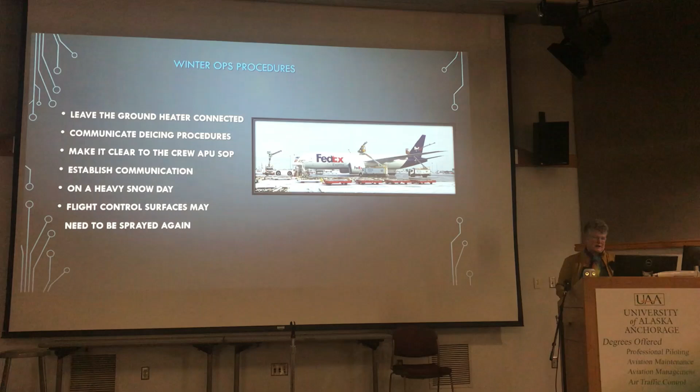And sometimes that de-icing process could be lengthy, especially when we turned it over to IDS. They didn't have the truck with no regulation on how much fluid was being pumped out of there like when we operated them. So because of environmental reasoning, you don't want all that fluid going out, but because it takes a while, you're gonna oftentimes have to spray those flight control surfaces again. And a couple more pictures of the heavies, and we'll get to the small ones.

Okay, so remember, inspection of that exterior of that airplane is important. So is your engines. You always have to remember ice fog is a foe, okay? We get a lot of it here in Anchorage. Get down around that 15-degree mark, dew point's just right, you're gonna have that ice fog. And when it comes to your engine inlets, super crucial.

That airplane taxis in, it collects that frost, it melts into a puddle at the bottom of the engine as it's sitting there on the ground, that refreezes. This can happen in a short ground turn. And presto, you have clear ice sitting in the bottom of that engine and your blades are sitting right there. You go to spool it up and it's not gonna be good. Okay, so we always had to be very cognizant of that.

You always had to inspect your landing gear, your engines, your wings, your fuselage, empennage, nose of that aircraft, looking from the front and back of those blades for damage or frost or clear ice. Because your winter ice checks are crucial. And it doesn't matter whether you're on a small plane or a big plane.

Right, but we are seriously governed by the FARs when it comes to keeping those airplanes free of ice, okay? So it doesn't matter if you're Part 121 or the small planes, Part 135 operators and 91, you're gonna have to all be in accordance with your FARs for keeping those airplanes clean. The clean aircraft concept. You're not going to take off with snow and ice on those wings, whether you're on a 747 or a Super DC-3.

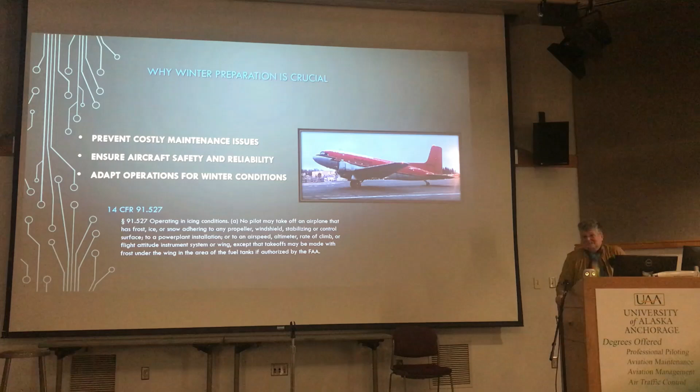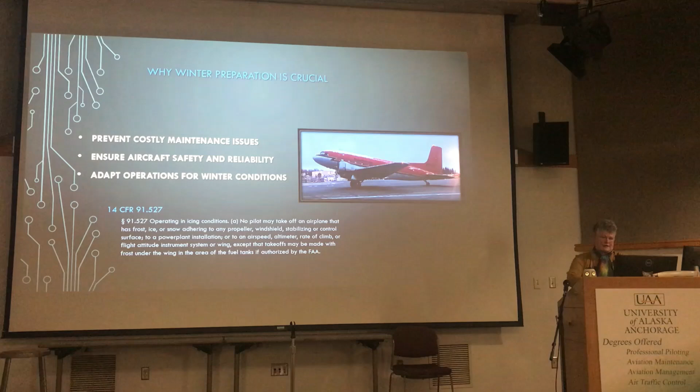If you're going somewhere where you're not used to flying into, check with the people who are there. You guys all know that, you're pilots. Here I am giving you advice to things that you've already lived a lifetime of doing, right? So don't let compulsion take the place of good judgment is really the bottom line. Prior planning will prevent costly maintenance issues and ensures those aircraft are safe and reliable. And remember, compliance with your Code of Federal Regulations 91.527 when we're talking about operating in icing conditions.

Now getting on to some of the mechanics of it. Minimizing corrosion risk is a good idea when we're talking about winter flying. Seal those openings, your vents, your fuel caps, etc. You can apply corrosion inhibitors to your metal parts. You can use desiccant plugs for your engine. If you're going to plan on not flying these airplanes, you want to take care of them to reduce the risk of what the harsh environment's going to hand to it. You know, it's sitting outside all winter long.

That engine oil is extremely important. It's good to use an anti-rust additive in it. And of course, comply with your maintenance manual recommendations always, but you want to make sure you meet your mil specs. So this picture of this aviation anti-rust oil container, Phillips 66, meets the mil spec MIL-C-6529. So you can check that with Lycoming, Continental, whatever your engine manufacturers are, and also airframe manufacturers regulations. You never want to put something in there that's not recommended.

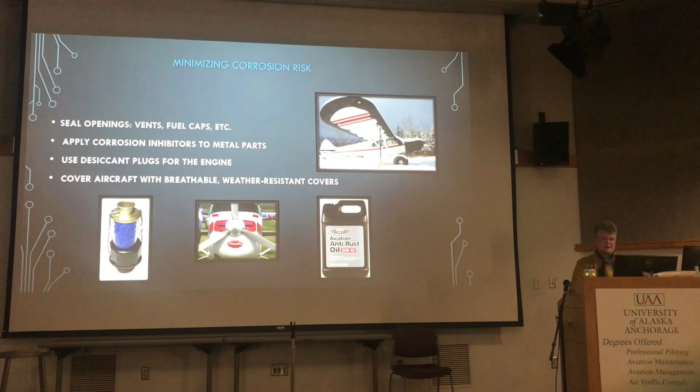Covers are good. Cover your aircraft with breathable, weather-resistant covers. Those can save you a lot of effort with your snow and ice removal. And then, of course, the engine plugs and covers. Sometimes they're referred to as cowl blocks, engine bungs, however you want to say it. But keeping weather out of those areas where it can get in is probably one of your best tools against shortening the life of your equipment.

Okay, so basing your airplane in a dry climate, washing it often, placing your airplane in a hangar, treating chipped paint and keeping windows and doors tightly sealed is ideal, but not really feasible on a regular basis.

We're not going to be washing our airplanes here. It's not like we can take them to the car wash like we do our cars, unless you have a hangar. But if you can do any of these steps, then you're lucky. And I would like to recommend at least performing a corrosion inspection prior to purchasing, or you may encounter what we did with that same 180 that we purchased out of Cordova in the 90s.

Oh, it was a great deal, $40,000, came with a couple sets of floats. Evelyn and I had just gotten out of school. Guess what our first job was to do? Replace that landing gearbox. Good thing we'd had a good sheet metal instructor here, because that was not a fun task. But I highly recommend doing your corrosion inspections prior to purchase, because we got not only to learn how to replace that, but we learned exactly what intergranular corrosion looked like.

Okay, and so there's a picture there on that bottom left. It's the Cessna gear brackets and the inboard angles that were manufactured originally using an extrusion process, which is geared for high volume, lower cost production. As that aluminum was extruded, the molecular structure of that material was altered, which made it more susceptible to developing that intergranular corrosion.

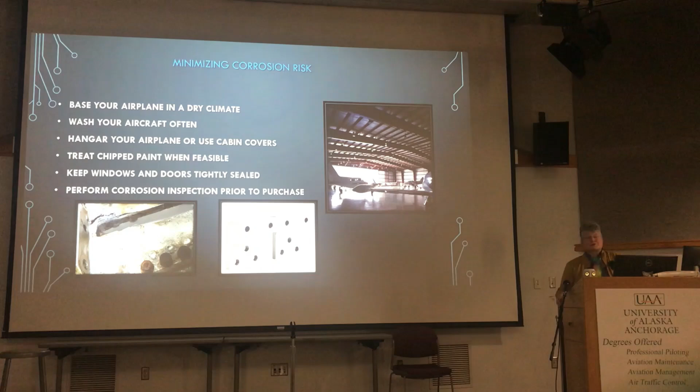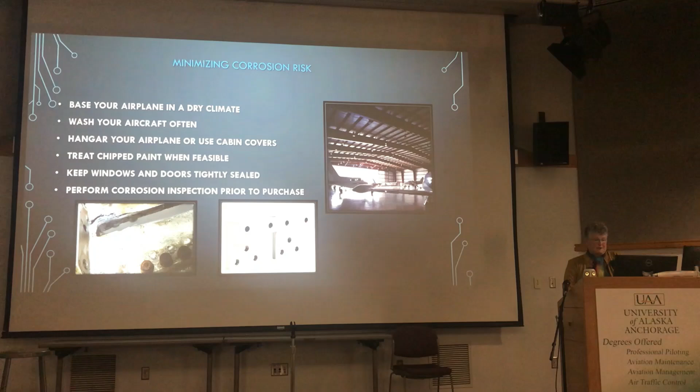So there's a picture of the P-Ponk upgraded, re-engineered inboard angle brackets for those Cessnas, whether 170, 180, or 185s. A lot of you probably already know about that, but you see these advertisements for these planes that say P-Ponk upgrade. Well, that's what they're talking about. Corrosion, so they make that as corrosion resistant as possible.

Of course, picture on the right there. If you can afford a fancy hangar, more power to you. That's where I want mine kept.

So anyway, if your home base, like most people, is located outside, there are some risks that can be imposed by prolonged heating of your engines. You don't want to just leave a heater on them. You want to use a thermostatically controlled heater and heat it only before flight to minimize that moisture, because the more you heat it up, cool it down, heat it up, cool it down, the more susceptible it is to moisture damage, okay? So heat it before flight to minimize that moisture.

What's your thought on Tanis? Tanis is now saying the opposite. Tanis is saying don't unplug it, and you'll have no corrosion. Yeah, if you're running on a regular basis, but for people who are just flying once in a while, once a month, you're not gonna leave it on heat continuously.

But yeah, I was reading over some of that Tanis. Some of their products they're pretty proud of, if you can afford them, but they do have the block heaters and the cabin heaters, and I will look into that. Most of the information I pulled was out of an FAA circular for winter tips on flying. But there's so many things, you could go all over the place trying to figure out battery charging, heaters, what are the best solutions.

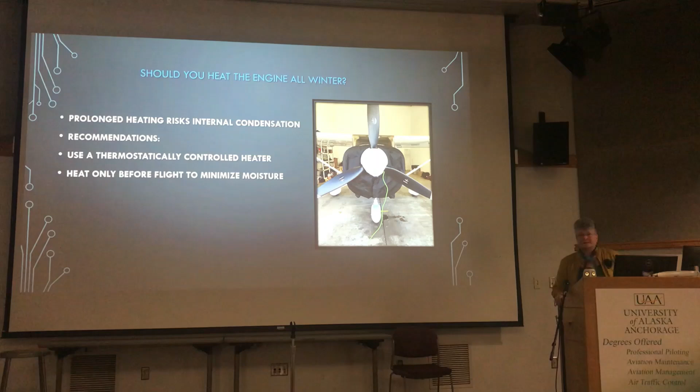What are some of your thoughts on heaters? I know it's all over the place as far as what type of heaters. Any of you have something you really prefer for a method of heating your fuselage and your engines? Ceramic heater, plug-in. I guess it depends on what kind of power you have available. If you have electricity, you're going to plug in electric heat, but if you don't, you're going to have to use propane or whatever fuel you have available, white gas.

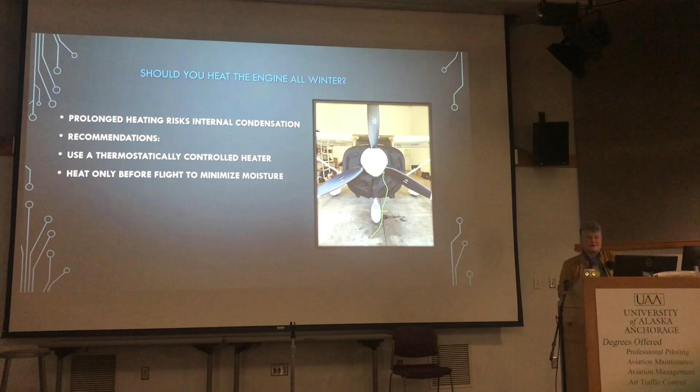But the biggest thing is water. Water's your enemy. You don't want moisture in there. Plan on how you want to preheat your engine. Some other tips: check your runway conditions, consider your weather changes, clean that frost off before you go. These are all just tips. Pre-flight inspection is important in temperature extremes; it's natural to hurry over the pre-flight of an aircraft, but take that time for your pre-flight inspection.

You want to consider also fuel contamination possibilities with moisture. Half-empty tanks in the cold, possibility of condensation, it's better to keep them full. Fueling facilities can also have problems in the wintertime, so checking that fuel, making sure it doesn't have water or contaminants in it, is important. It says fill your tanks up as soon as possible after landing. Drain the fuel sumps to remove any water which may have been introduced. Be sure the fuel being delivered for your plane is clean.

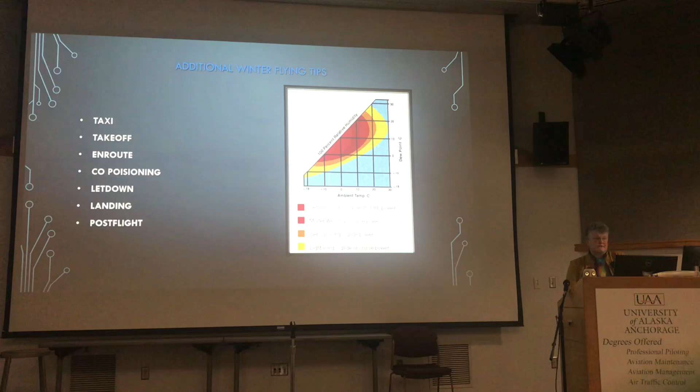Use carb heat on a ground check, use heat in the icing range, and use heat on approach and descent. Warning signs of carb ice include loss of RPM with fixed pitch, drop in manifold pressure with constant speed, and rough running. Pilot response to warning signs should be to apply full carb heat immediately, and the engine may run rough initially for a short time while the ice melts.

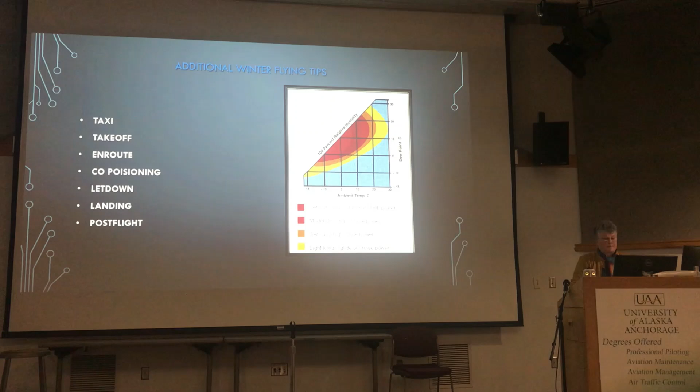And in the chart below, the curves are showing favorable conditions for carburetor icing. So when you receive your weather briefing, note the temperature and dew point and consult that chart.

Also, you want to be cognizant of carbon monoxide poisoning. There's just so many different things to consider when you're talking about winter flying. You want to have carbon monoxide detectors in your plane, whether it be the little cards or the plug-in types they're now recommending. Highly, I would have both myself. That way you have some redundancy, because it's a silent but deadly killer. Of course, if you do encounter some, shut off the cabin heater, get some fresh air coming in, and please put out that cigarette.

So what about your batteries? Batteries are kind of what I like to teach. Okay, store your batteries in a temperature-controlled environment. It's not always ideal to take your battery in and out of your airplane, especially when it's stuffed in the back behind a panel. Get your technician to do it, that's what we're for. Make them do the work.

But if you are going to leave it in your plane, these sealed batteries they have now... how many are still operating the old lead acid batteries where you have to check their specific gravity? Okay, those don't like cold, right? They don't like it at all. Most batteries don't. Look at our car batteries. How long do they usually last in a long winter? They don't like cold. It wrecks your state of charge, let me just put it that way.

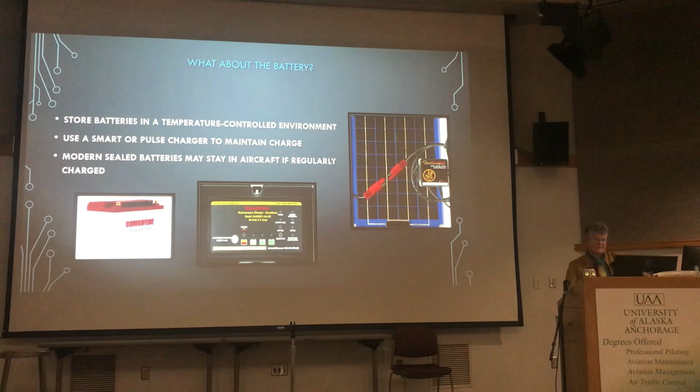If you're with the old lead acid batteries, unsealed, you need to consider if you're operating in a colder climate, say coming from Fairbanks down to Anchorage, take into consideration your state of charge and your temperature corrections, straight out of 43-13 and your manufacturer's recommendations. If you're sitting at -30 in Fairbanks and you're coming to Anchorage at +30, you have to subtract points from your specific gravity reading to make sure that you've got the correct reading for your city level. So a fully charged battery will not freeze.

When we're talking about adding water to those batteries in extremely cold weather, you need to charge it immediately, okay?

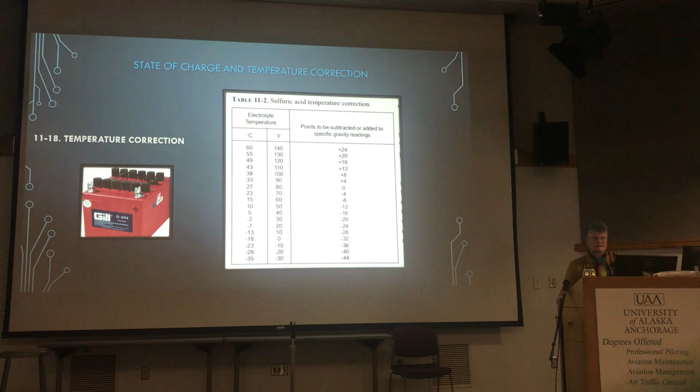Could you put the previous slide on? Oh, yes. There you go. So you want an example? Oh, sorry. Thank you. There you go, you're welcome.

Okay, so when we're talking about cold weather and specific gravity, you have to also take into consideration the freezing point of your fluid. So if you've got a specific gravity that's up at 1.30 fully charged, you're gonna be good down to -95 on the freezing point of your electrolyte. But if you go down to one that's 1.10, which is pretty much dead, you're gonna have a freezing point of 19 degrees. So it doesn't take much to freeze a battery.

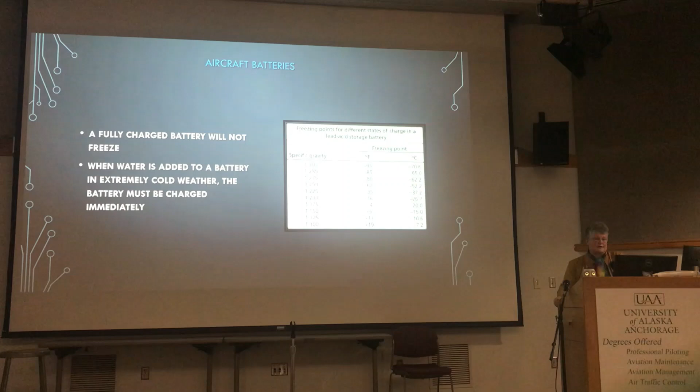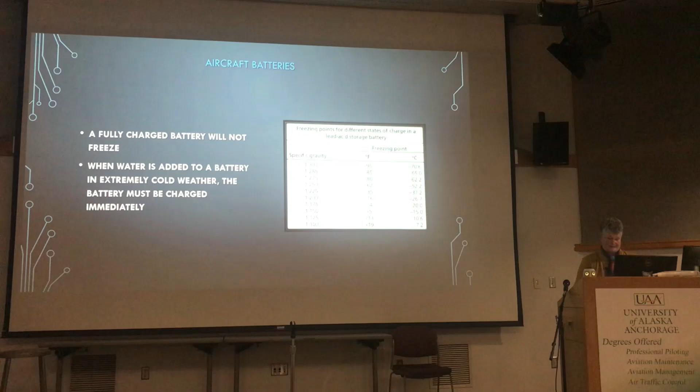But the biggest thing is if you do add water to that battery in cold weather, you need to remember to charge it immediately. Otherwise, that water doesn't mix with the acid sufficiently and it will freeze and expand and crack your battery. Wreck it, basically.

So when does snow become a problem? Well, we talked a little bit about snow load on your planes. So snow can overload structural limits of wings and tail surfaces, and it doesn't matter whether it's on a big plane or a little plane, a house, or any kind of other structure. You want to get that snow load off of there. So when we talk airplanes, ideally we would remove those snow accumulations as early as possible. As soon as it stops snowing, get out there and get that snow off of it.

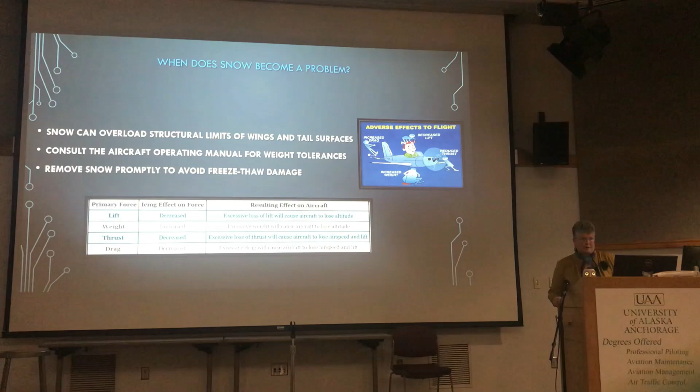Consult the aircraft operating manual for your weight tolerances. If you're going to be out of town, have somebody assigned, sound like a teacher, assigned to come make sure that snow's removed from your airplane and that it's taken care of. You don't want to leave that on there, as most of you already know.

Remove snow promptly to avoid that freeze-thaw damage, because when you're talking about snow load on there, it's going to cause excessive loss of lift. Obviously, you don't want that weight causing an airplane to lose altitude, and then also your thrust can get decreased, your drag's going to increase with snow on the plane. Anyways, it's never your friend. You don't want it to have a problem because you didn't take care of that snow load.

There's all kinds out there. People make their own. My favorite, of course, is on the next slide, but you can't use that in all situations. It's mainly for larger applications. But regardless of the type of heat that you use, you want to ensure even heat distribution. You want to make sure your cockpit's been preheated. And that's going to help prevent avionics and instrument failure by warming that cockpit up. Of course, not all of us can afford to take around your best buddy Herm with you, last name Nelson.

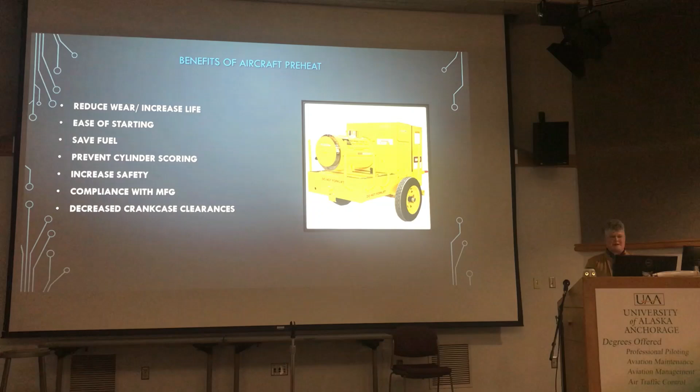So anyway, the biggest point for thinking about when you're heating things up is you want to reduce that engine wear, increase your engine life. That's going to help you with the ease of starting. It's going to reduce that chance of frosting those plugs. It's going to reduce the run-up time that's required during winter operations and save you fuel. It's going to prevent cylinder scoring. It's going to ensure proper oil flow, increase safety.

And engine manufacturers mandate preheating. Okay, they don't want you going out there and not preheating it. The engine crankcase is made of aluminum. Engine rotating parts are made of steel, and due to that coefficient of thermal expansion, the aluminum crankcase shrinks more than the steel parts that are in it. So, you heat it up, it helps save that from happening.

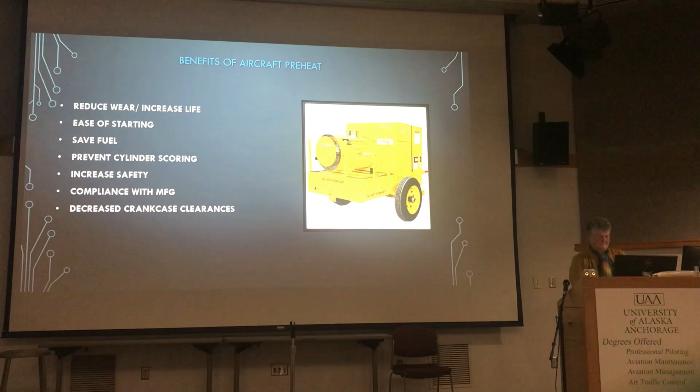In that picture there on the right's a VTX 400. It's a series of indirect fired heaters, Herman Nelson. Of course, we had the old gas kind originally at FedEx. I was scared to death of those things for years. I caught one on fire. They've improved them a lot. They're all easy to use now.

So having the covers on is probably your first line of defense, keeping that airplane covered, because unless you have it in a hangar, or you can put it in a warm hangar to thaw it out, you're going to have to get that off there one way or the other without damaging the aircraft. So you don't want to use any kind of sharp tools. You use whatever works best for you.

Sometimes, like Rocky and I were talking about yesterday, you get out there soon enough, you can take those leaf blowers. My husband has one of them too, sitting right next to Rocky. Take that light snow, those leaf blowers work great. You blow it all out of there. So that's a good line of defense. So clear that snow and ice promptly post-flight. Apply those water displacement sprays where you can. Inspect for moisture before storage. And I was talking to Joe yesterday about it: your flight control surface hinge areas need to be inspected. Make sure you don't have any ice in those either.